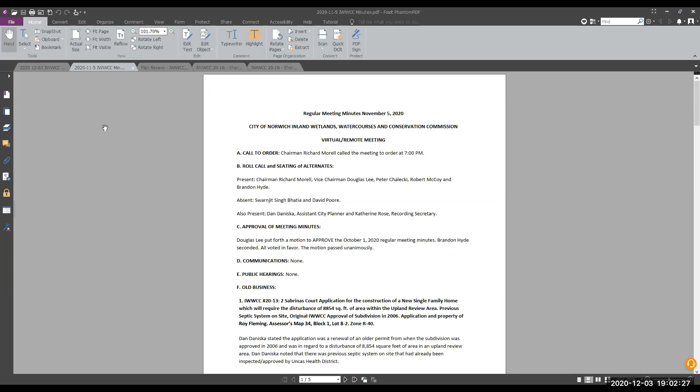Do I hear a motion to approve the minutes of the meeting from November 5th? Pete Chalecki, motion to approve. Is there a second? Singh, would you like to unmute and second? Yes, I wasn't present. Oh, that's true. Okay, then I will second the motion. All in favor, please state your name, saying aye. Pete, aye. Any opposed? Hearing none, so moved.

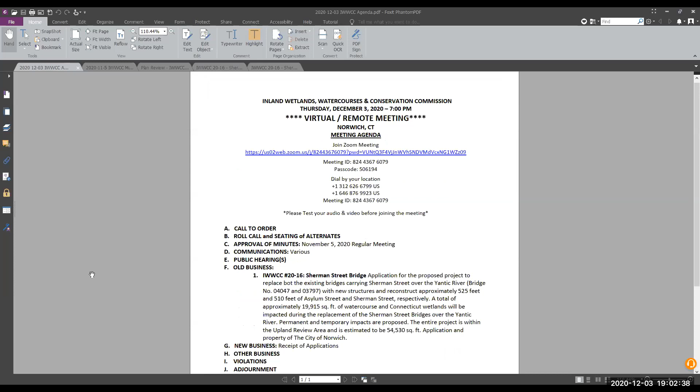Communications? I actually don't have anything for you tonight. Okay, and there are no public hearings. That brings up old business, IWWCC number 20-16, the Sherman Street Bridge. Tonight, we will hear from the applicant. You can have questions, and then we'll have to decide whether or not this is a significant activity and whether or not it needs a public hearing. So is it John or Pat or Dan, you going to introduce the project? Yeah, John's going to present. I'm going to switch the screen to the PowerPoint, and John, you can unmute and just let me know when to switch the slides, and I'll do that for you.

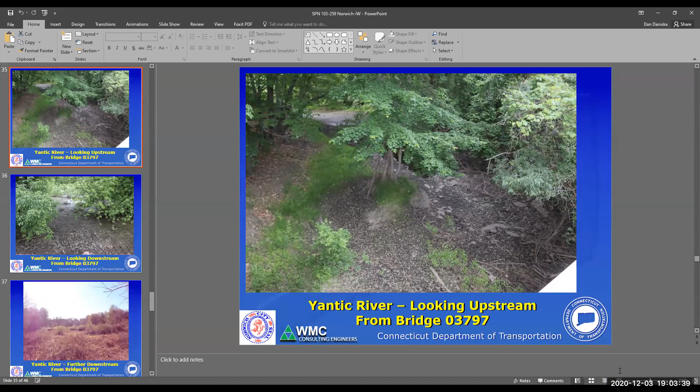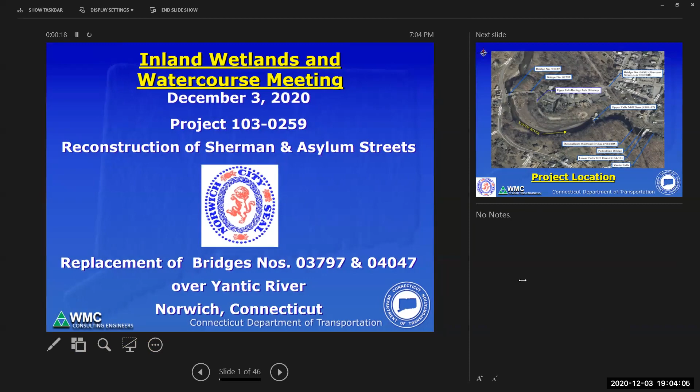Can everyone see the slides? Yes, Rich. Can everyone hear me? Yes. Well, my name is John Wengel. I am from WMC Consulting Engineers. We're the engineering firm that was hired by the city to do the design services for the Sherman Street bridges. So this presentation is for the Inland Wetlands and Watercourses meeting for today. And the state project number is 103-0259. So as I was mentioning, we have two bridges. State bridge numbers are 03797 and 04047. And they're both over the Yantic River in Norwich.

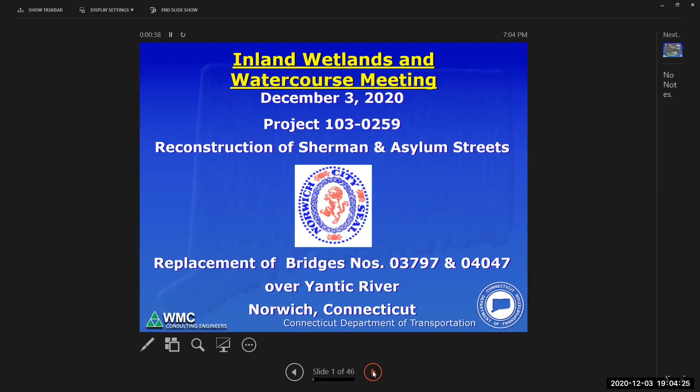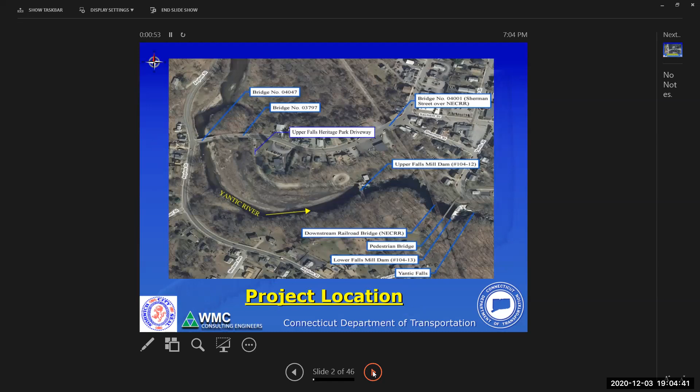Dan, could you please go to the next slide? This is an aerial view of the overall project location. Up to our left, you'll see the two bridges that cross the Yantic River. You also see where the Upper Falls Heritage Park driveway is, and the dam that's just downstream. Next slide, please. This is just a blow up of the intersection and the bridges that we're going to be working with. Next slide, please.

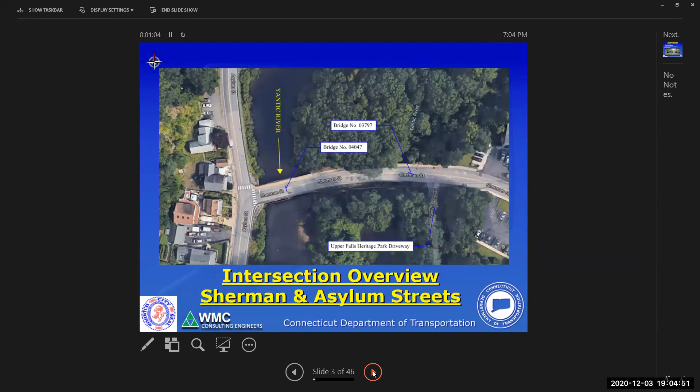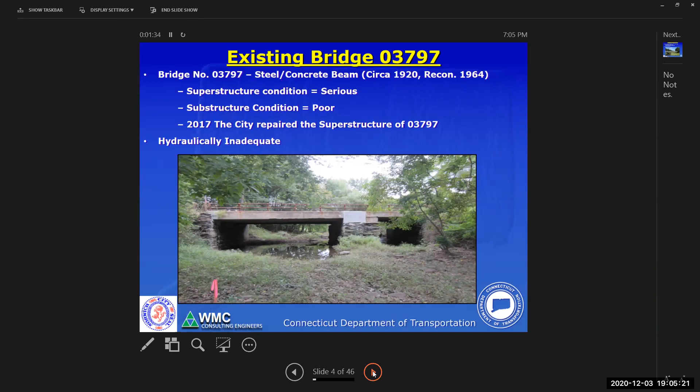The existing bridge 03797 was a steel and concrete beam bridge built in approximately 1920. There was some reconstruction work in 1964. Currently, based on the DOT inspection report, the superstructure is in serious condition, and the substructure is in poor condition. In 2017, the city did some repair work to the superstructure, and currently the bridge is hydraulically inadequate. Next slide, please.

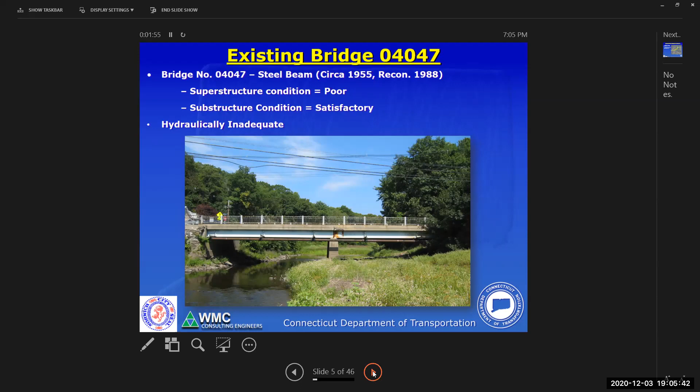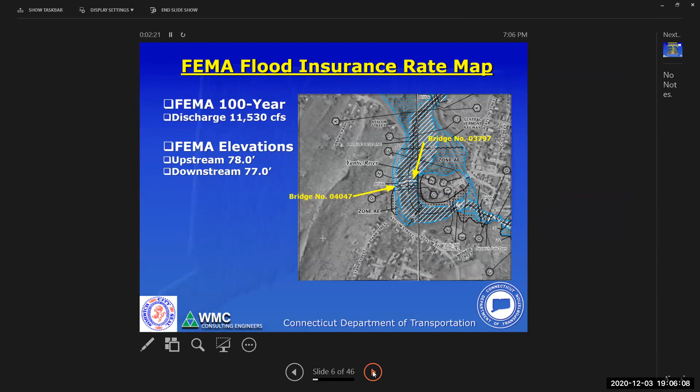Next slide, please. The project is within a FEMA 100-year floodplain. The FEMA discharge is 11,530 CFS. Upstream of the bridge, the 100-year elevation is 78 feet, and downstream it is 77 feet. So currently, the 100-year flood overtops the road, mostly in the vicinity of Asylum Street. Next slide, please.

So our overall project plan is to reconstruct about 1,030 feet of roadway on both Asylum and Sherman Street, and of course the 2 bridge replacements. And if you look at the plan here, you'll see the yellow represents the area of roadway reconstruction. The orangish color is concrete, such as sidewalks and the bridge structure. And we have the cut and fill limits in a greenish and a brown color, and of course the watercourse.

If you note here, the existing 04047 bridge, which is at the intersection of Asylum, we are actually trying to shift that alignment slightly to the north to create more of a T intersection with Asylum Street. Now we'll improve the turning radius out at the site.

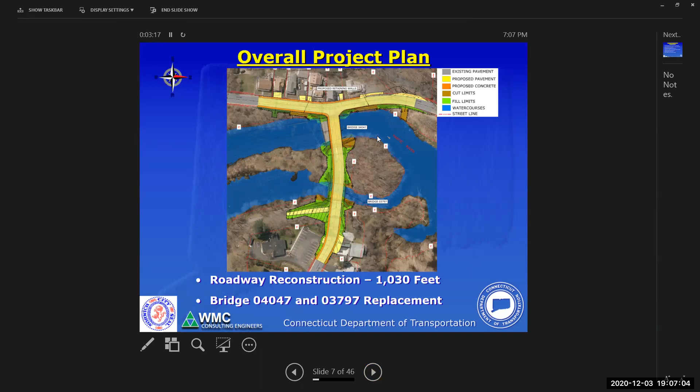Next slide, please. So I'm going to start with 03797. The proposed construction for this project is to be a full replacement. We are going to replace the bridge with a 54-foot clear span precast concrete arch. We are going to remove the existing pier to bedrock or 1 foot below grade.

If you notice from that previous picture, there is a large pier and portion of the bridge, and it's probably about 10 to 12 feet wide, and it goes to about maybe 2/3 of the way of the road. The upstream portion was that reconstruction portion, which spans the entire river. We are going to increase the out-to-out width from 32 feet to 60 feet. And when we get to the section, you'll see where that large increase comes from.

Over the roadway, we're going to be providing 2 12-foot lanes, 2 4-foot shoulders, and a 5-foot sidewalk. And we'll be moving the sidewalk from the northerly side to the southerly side. We are founding the bridge on bedrock, so embankment protection for scour will not be necessary. Our plan for the channel is to maintain all the existing grades, and where we remove the pier and any disturbance to the channel for excavation of the abutments, we are planning to stockpile that existing material. And I'll get a little farther in the presentation.

At the site, historic mill work and factory work on the Yantic River has polluted the river. A lot of the sediment's polluted. So a lot of the material that we'll be excavating from the site, both in the river and the embankments and the roadway, is contaminated soil. All that material will be taken off site, tested, reused if possible, or disposed of properly. So if we can reuse it, we'll reuse it. If we dispose of it, it will be moved off site, disposed of properly.

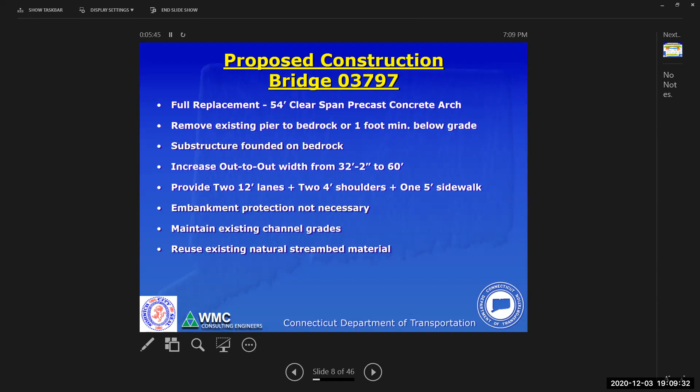My understanding right now is a lot of the stream bed sediments are contaminated, and we most likely won't be able to reuse the existing material. But in the contract, we have an item called supplemental stream bed material, which is designed to replicate the type of material that's in the stream bed. So if we need additional material, which I believe will be the case in this project, we have a specification there to have the contractor put natural stream bed material back in the stream. Next slide, please, Dan.

So this is a picture of the elevation and section view. So elevation-wise, as I mentioned, we have a precast arch, and it's founded on bedrock. Now, I just want to make one note here. To the right of the screen, we had a foundation for the abutment that seemed pretty deep. That has been altered. We went with the scour analysis at the site, and that has been removed. So that footing is no longer there. It's actually going to be brought up to the elevation similar to the other side.

As you can see in the middle of the stream, we are removing that pier. We're going to be replacing it with stream bed material. And also at both the abutment sides, we'll be replacing that with stream bed material. That line there is the ordinary high water elevation, where we're showing that's typical spring flooding. Ordinary high water is what we delineate the watercourse boundary by.

The section down on the bottom there is just an overview of what the top of the apex of the arch will look like. As I mentioned earlier, we're going to have the roadway and the shoulders and the sidewalk. Then we'll be spanning the area with new proposed guide rail. And then the structure will extend out beyond that, and our slopes will go down to 2 head walls on both sides. Next slide, please, Dan.

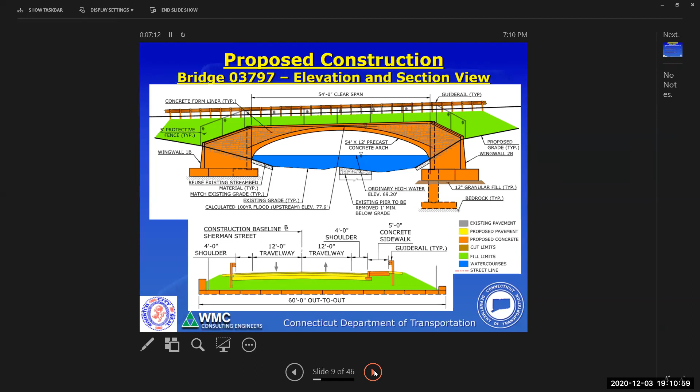Bridge 04047 will be a full replacement with a 98-foot clear span precast Northeast deck bulb T-beam. Similarly, we have an existing pier, which we are going to remove to bedrock, or at least 1 foot below grade. Our substructure will be founded on bedrock. We are increasing the overall out-to-out width from 33 feet to 41 feet. We are providing 2 12-foot lanes, 2 4-foot shoulders, and a 5-foot sidewalk. This structure is also founded on bedrock, so scour protection along the embankments will not be necessary.

Our goal is really to maintain the existing channel grades along the installation. We do have some cut material that we're taking out of the river left, where there's a lot of sediment deposits. We're going to open that up to improve hydraulics. And the same thing with the existing stream bed material. We plan on reusing it or providing a supplemental material for material that we cannot reuse.

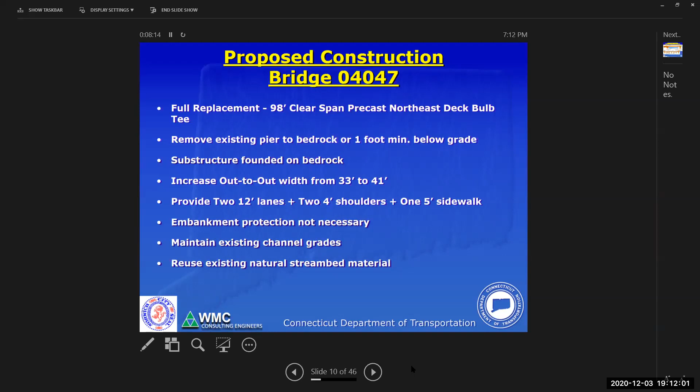Next slide, please. This will be an elevation section view of our 04047 bridge. As you can see in the center there, we'll be removing the pier. Again, the water elevation is quite high for ordinary high water as opposed to normal flows. I don't know if any of the commission members have been out to the site, but the water fluctuates quite drastically due to the downstream dam, which is one of the reasons why the bridge overtops. It causes backwater effects. So it frequently will flood to this elevation and then recede down to a much lower elevation. In this case, most of the flow of the river stays over on the left side of that elevation view and that lower thalweg part of the channel.

Below that, we have a section view. So this is what our bridge is going to look like. Those bulb T beams will be installed across the watercourse. It'll be a clear span, so we'll remove the pier out of the watercourse, prevent debris and things from backing up, and also improve the hydraulics. Next slide, please, Dan.

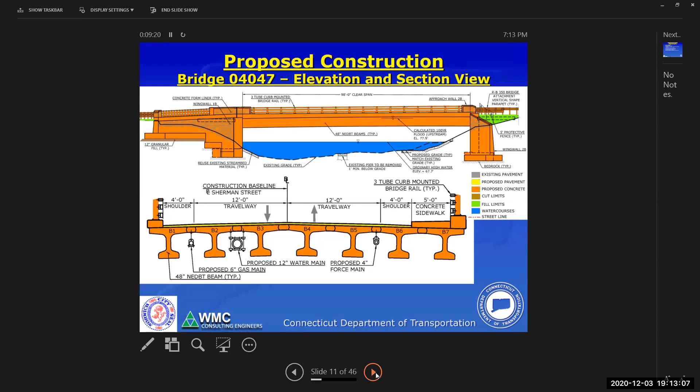Excuse me. This construction staging for both bridges will be 2 years, but our first year we are planning to replace bridge 03797. So we're going to close Sherman Street. We're going to install our water handling cofferdams in that secondary channel. We're going to maintain flow in the large channel. We'll install our bridge and wing wall footings and the bridge itself, the wing walls. We're trying to use a lot of precast elements in this project because we really want to move as fast as possible and get the roads reopened for the wintertime.

There's also a lot of utilities that we'll be dealing with, which during the first season, we'll be doing a lot of utility work on Asylum Street. And we'll be doing that the first year. So after we put the bridge, we're going to complete portions of the Sherman Street roadway and put a temporary roadway in and reopen the bridges for the winter season. Next slide, please.

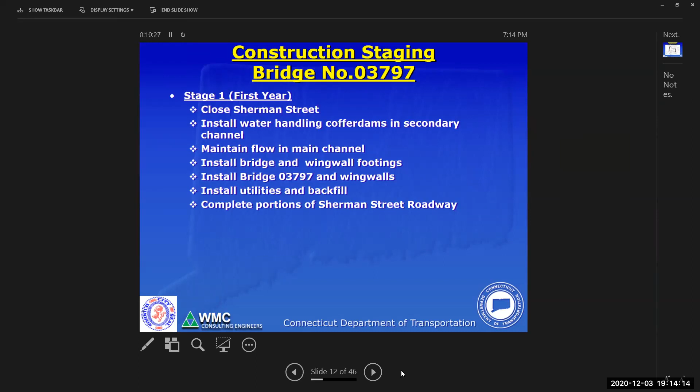So the first year, this is what we'll be proposing. We have a cofferdam system, both upstream and downstream, or excuse me, a water handling system. Now, as I mentioned before, the water backs up from the dam. And so for our temporary design storm, we have a very large water handling system. Now there's bedrock there. So this is most likely going to be a large stack of sandbags or large super sacks that they use to keep the water from flooding the site. And all that water primarily goes to the west of this project in most of the circumstances. But when the water does rise, this site will be dry. And then we're going to construct everything in the dry between these cofferdams for this bridge. Next slide, please, Dan.

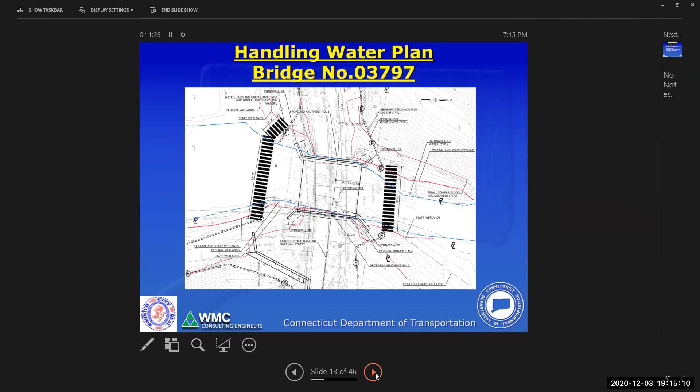The next year, we're going to come back and we are going to work on the 04047 bridge. Now, this bridge is, due to the span length and the access, we're going to maintain traffic on Asylum Road. So we have a little bit of limitation of the contractor's work. So we're going to install our temporary cofferdams along the western abutment. And then when we get to the next slide, we'll see that we're going to maintain traffic in the northbound direction. We'll be able to enclose the site and provide access to the contractor from a portion of the existing bridge.

So we're going to maintain the flow channel. We're not going to cut the channel off. We are, and we're going to construct a superstructure. Let me go back a second. After we complete abutment 1, which would be the western side, we are going to then remove the other span and construct the eastern abutment. If you go to the next slide, please, Dan.

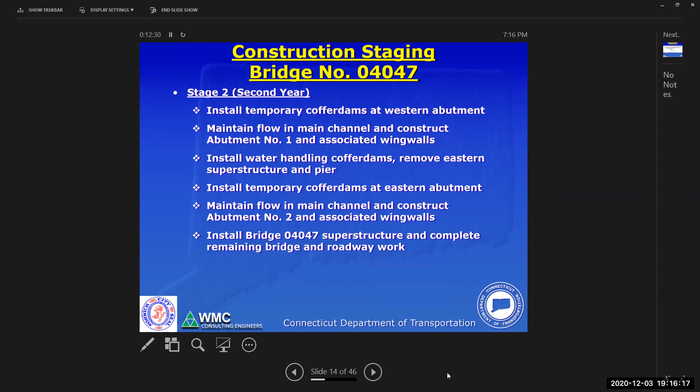So this is the stage 1 of the second year. As you can see, we are going to encircle the entire site with a cofferdam system so we can do the excavation work and all the installation of precast units and the abutment.

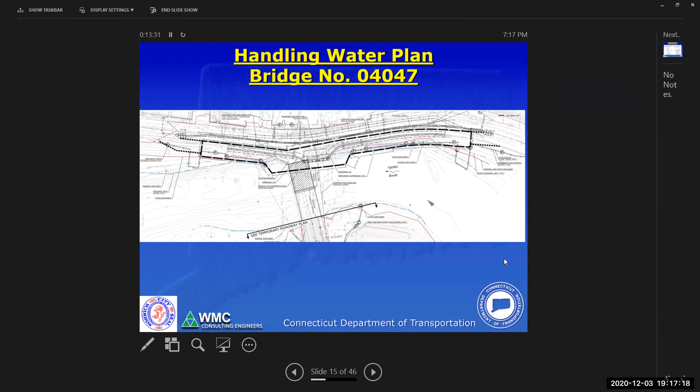Next slide, please, Dan. So after we construct that, we'll plan to come back with our 2B or our second stage. And we're going to put a shallower cofferdamming around that pier. So we'll remove the eastern span of the superstructure, and then we'll remove the pier. Now, that's not anticipated to be a very long stage. So we have a much shallower, or sorry, not as high cofferdam system to keep the water in the fallway portion of the channel.

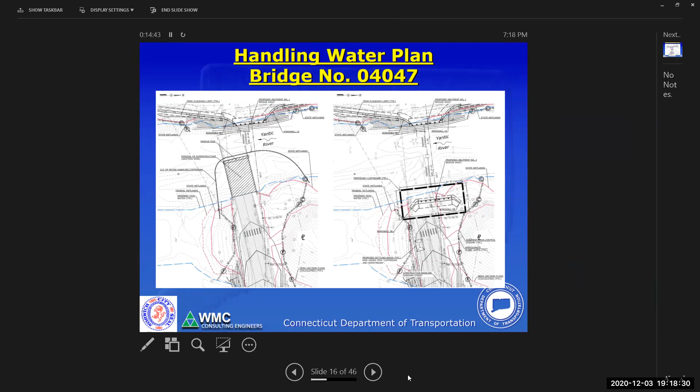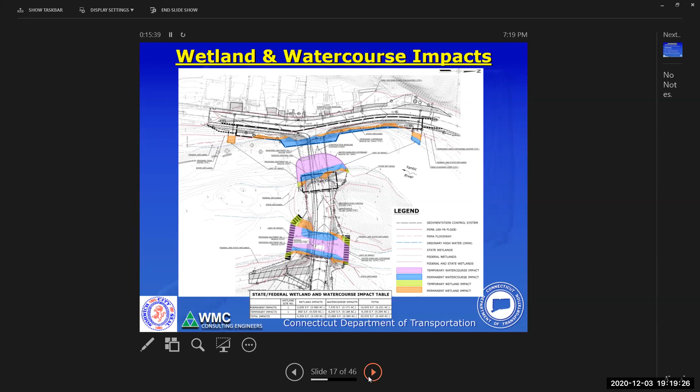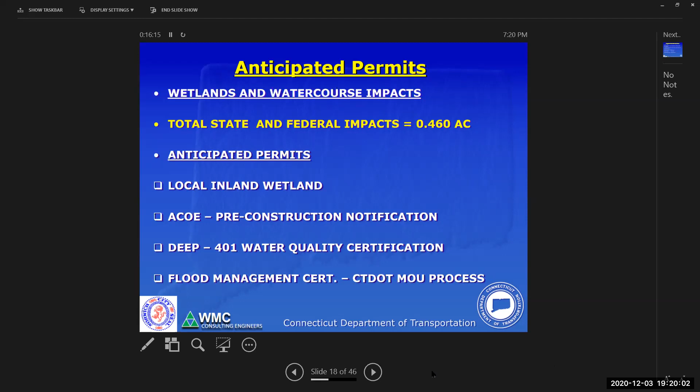Next slide, please, Dan. So we're looking at about 0.46 acres of state and federal impacts. We have anticipated our local inland wetland permit. We've also met with the Army Corps and DEEP. So at this point, we know that we need a pre-construction notification from the Army Corps, and we will also need a PCN 401 water quality certification from the DEEP. There's a flood management certification that just goes through the CTDOT MOU process. That will be a flood management permit through the state.

Next slide, please. Currently, this project is about $14.6 million. There's some federal, state, and city funding: 80% federal, 10% state, and 10% city. Right now we're on track for a spring 2022 construction. Like I mentioned before, it'll be a 2-year project, so we have a 20-month duration with 1 winter shutdown.

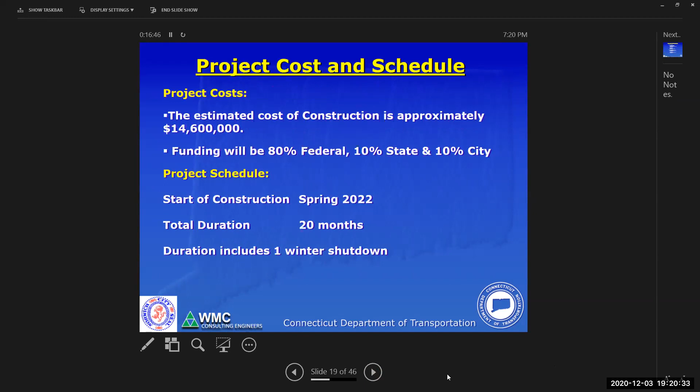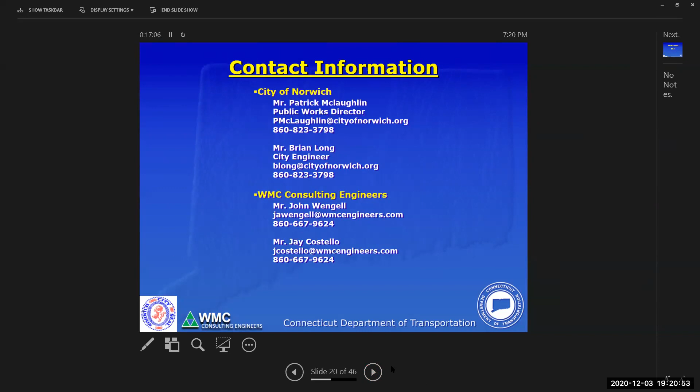Next slide, please, Dan. As most of you know, Pat McLaughlin and Brian Long from the city are contacts for the city of Norwich. Myself and Jay Costello are representing the town as their consultants, and our contact information is there if you want to ever reach out to us and ask any questions. Next slide, please, Dan. So that's my presentation. I'd be happy to answer or go over any questions you may have.

John, I take it by widening the channel by some 40 feet, what you're hoping to do is lower the river level at peak? Oh, we're not necessarily opening the width of the channel as increasing the length or the width of the bridge and the roadway over that second channel. Our hydraulic improvements are going to come from raising the profile of the road.

I guess I didn't mention that, but we will be raising the intersection of Asylum and Sherman Street by approximately 15 inches. So by making those improvements, we're going to be putting the 100-year water surface elevation underneath the bridge. Now, we're not totally going to remedy the flooding that Asylum Street experiences. There will still be some flooding to the north of the intersection, but what we're trying to do is keep the bridge from overtopping. Okay.

How long would you say the road is going to be closed in that first year? Sherman Street will most likely be closed for the whole season, eight months. And that's the bridge both directions? Yes. So we're going to have Asylum Street open, and then at the end of the first year, we have to pave. So probably paving will have to be complete by end of November, early December the latest, depending on the temperature and the construction. But we want to put a temporary road in, reopen that road for the winter time, and then back in the spring, go back to closure.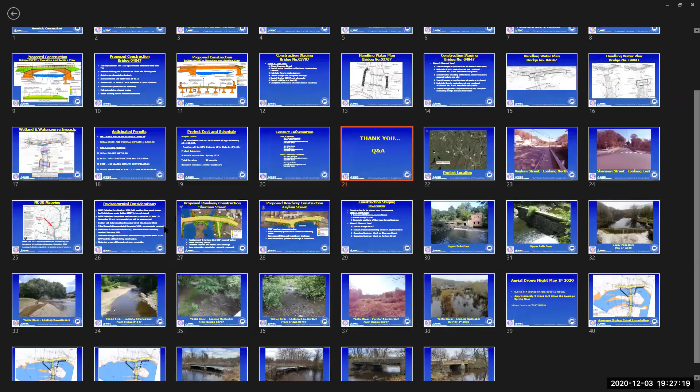And if you've noticed, there's also a 3-way stop sign out there now. Yep, the one that we're going to maintain after the bridges, and my understanding is that's working pretty well currently. The one with the lights. Yes, flashing lights. We're going to maintain that. So when construction's done, we're going to have that back in place. We're also putting in new crosswalks and handicap accessible ramps, so we're going to make some improvements to the sidewalks too. Great.

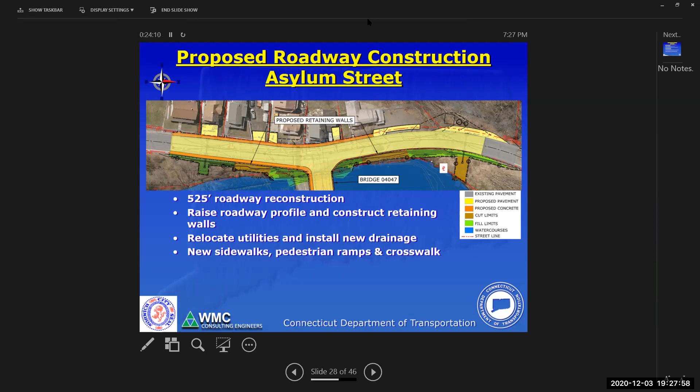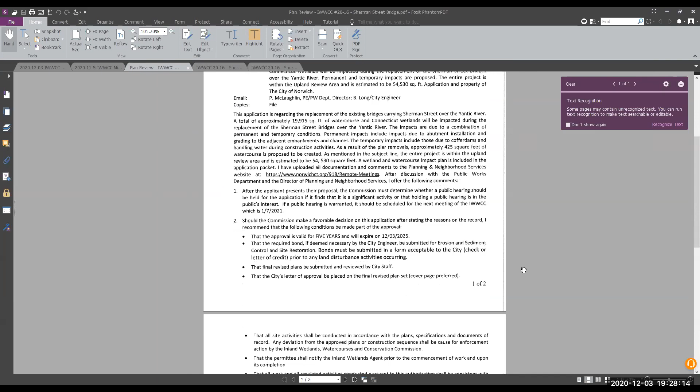Dan, I know that you made 12 recommendations in the memorandum dated 12/1. Is there anything else that you or Pat would like to tell us? I don't have any further comments. I just ask that, as always, you include the bullet points from the memo in your motion, but they're all pretty standard. I defer to Pat if Pat has anything further to add. No, I think John covered it pretty well. This project's been a long time in the making. We've been working on it for a while, so there has been a lot of thought put into it, and we're finally getting closer to construction.

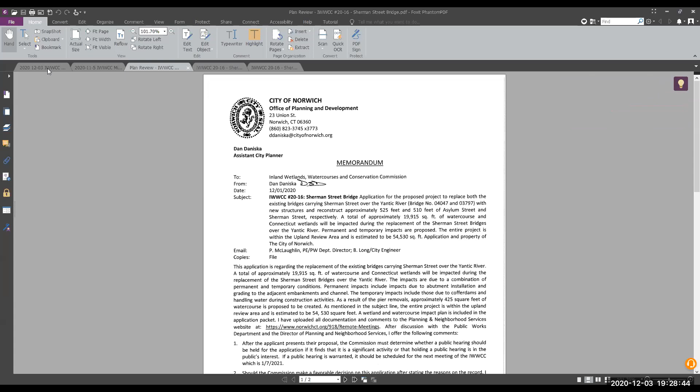That was a very good PowerPoint presentation. Thank you. Gentlemen, what we have to determine is whether or not this is a significant activity. If anyone has any thoughts, beginning with Peter. Does the amount of disturbance have any bearing on the public hearing part of it? Rich, do you know? Dan, I believe the Army Corps has a, what can I say, a minimum?

Yeah, I would just add that the city and DOT already hosted a public information session previously. I can't remember when it was. Pat, I don't know if you have that information. I think it was within the last year. Yeah, so I think between that session and tonight, the city's done public outreach, but it's up to you. Yeah, I remember that. It was a little over a year ago, I believe. Yeah, right.

Okay, Robert, do you have any comments? Well, I don't think there's that much disturbance. Every storm seems to be a big disturbance there, I guess, from the amount of sediment moving and everything. Singh, do you have any comments whether or not this is a significant activity? No, I don't really see that as significant. Okay, so we need a motion whether or not this is a significant activity.